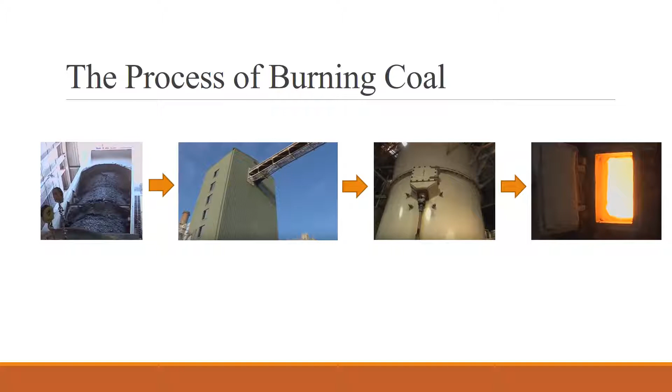The process of burning coal begins in the crusher house. Appropriately named, the crusher house crushes the coal until it is small enough to enter the pulverizer. The pulverizer further grinds the coal into a fine powder. As a fine powder, the coal is ready to enter the boiler. In the case of Gainesville Regional Utilities, the boiler was designed to burn the coal at a temperature of 2400 degrees Fahrenheit to generate 1.7 million pounds of steam per hour.

This steam heats steel pipes filled with water, producing approximately 2,000 pounds of pressurized steam, which is applied to a turbine. The spinning turbine delivers 315,000 horsepower to an attached generator, providing the plant with 248 megawatts of power.

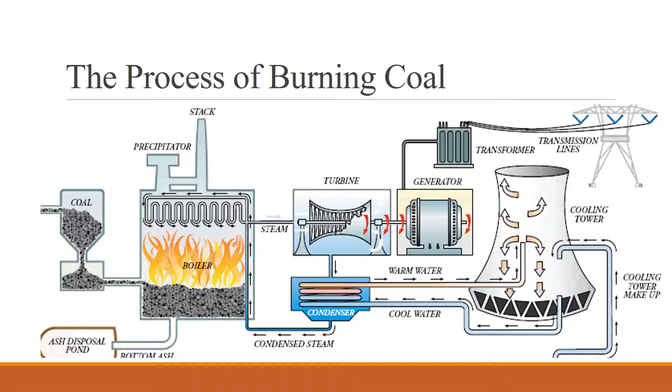The problem with this process lies within the coal content and applied heat. Coal consists primarily of carbon, hydrogen, nitrogen, oxygen, and sulfur. When heated, the elements are capable of reacting with one another, and as a result, pollutants such as nitrogen oxides, sulfur dioxide, and carbon monoxide are formed.

When electricity is generated in coal-fired power plants, harmful fumes called flue gas are produced. These fumes contain toxic pollutants that could be emitted into the environment if not properly controlled. Regulations are put in place to ensure proper air control technologies are implemented and industries are able to provide power to the public without jeopardizing their health.

Last amended in 1990, the Clean Air Act required the Environmental Protection Agency to set national ambient air quality standards for pollutants considered harmful to the public and the environment. The pollutants listed under these standards are considered criteria air pollutants and are strictly regulated.

On December 16, 2011, the EPA finalized the first national standards to reduce mercury and other toxic air pollution from coal and oil-fired power plants. However, it was not long until industry challenged the standards put forth by the EPA, requiring additional cost-benefit analysis the following year. This exchange went on for a while until the EPA was able to finalize the supplemental findings in 2016, ensuring the enormous health benefits of the mercury and air toxic standards.

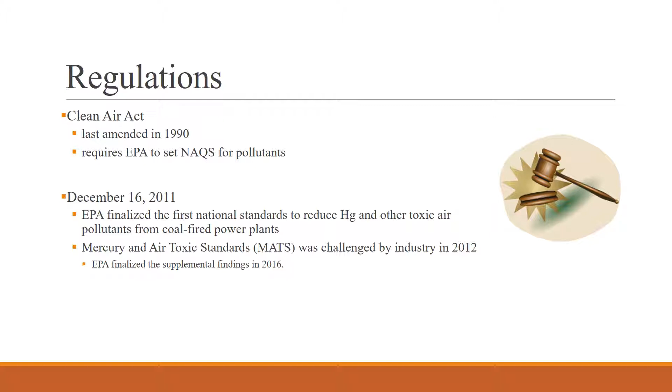With the standards put in place by the EPA, we can control the emissions of harmful pollutants from coal-fired power plants. Pollutants created by combustion of coal include nitrogen oxides, sulfur dioxide, lead, particulate matter, mercury, and carbon monoxide. For nitrogen oxides, nitrogen dioxide is regulated by the emission standards put forth by the National Ambient Air Quality Standards.

The primary standards put forth are to provide protection to the public health, while the secondary standards listed are to provide protection to the public welfare, animals, crops, and vegetation. The primary standard for nitrogen dioxide is 100 ppb. This is in the form of the 98th percentile of 1-hour daily maximum concentrations over 3 years.

The primary standard for sulfur dioxide over 1 hour is 75 ppb in the form of the 99th percentile of 1-hour daily maximum concentration, also averaged over 3 years. On the other hand, the secondary standard for sulfur dioxide over 3 hours is 0.5 ppm and is to not be exceeded more than once per year.

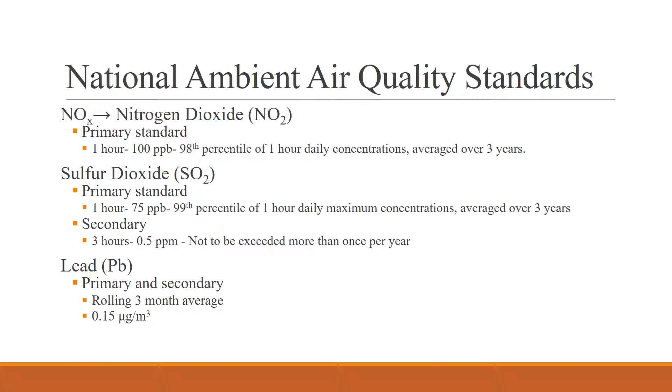The primary and secondary standards for lead are the same at 0.15 micrograms per cubic meter. This is on a rolling 3-month average basis. For particulate matter, PM2.5 and PM10 are regulated and both contain primary and secondary standards of 12 micrograms per cubic meter and 150 micrograms per cubic meter, respectively. These are under the designated time intervals.

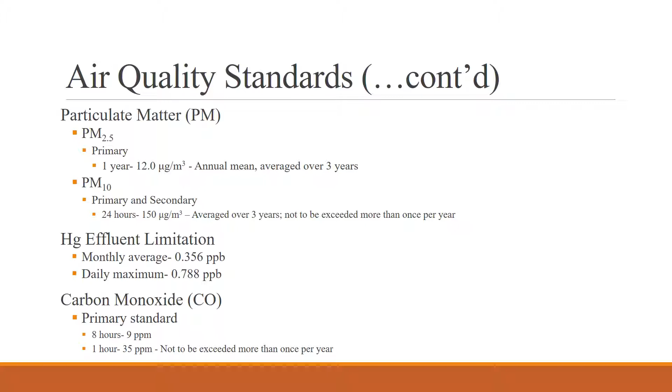Emissions of mercury are regulated under the Mercury and Air Toxic Standards, also known as MATS. These standards establish an effluent limitation of 0.356 ppb on a monthly average and 0.788 ppb as a daily maximum. Last but not least, the primary standard for carbon monoxide over 8 hours is 9 ppm, while over 1 hour the standard is 35 ppm and is to not be exceeded.

A major concern of coal burning is the impact of particulate matter, classified as PM2.5 or PM10. Both contribute to respiratory problems. However, PM2.5 travels deeper into the airways than PM10 and is therefore a greater concern. PM2.5 has been linked to causes of asthma, lung infections, and with long exposure has been linked to more severe illnesses such as chronic obstructive pulmonary disease or even lung cancer.

Sulfur dioxide can also affect the respiratory system, posing greater risk to children, the elderly, and to individuals with pre-existing respiratory problems. For adults and children who are susceptible, inhalation of sulfur dioxide causes inflammation, bronchitis, and decreases in lung function. Further threatening the health of those susceptible, nitrogen oxides react with chemicals in the atmosphere to create pollution products such as ozone, nitrous oxide, and nitrogen dioxide, which can increase wheezing and coughing in asthmatic children.

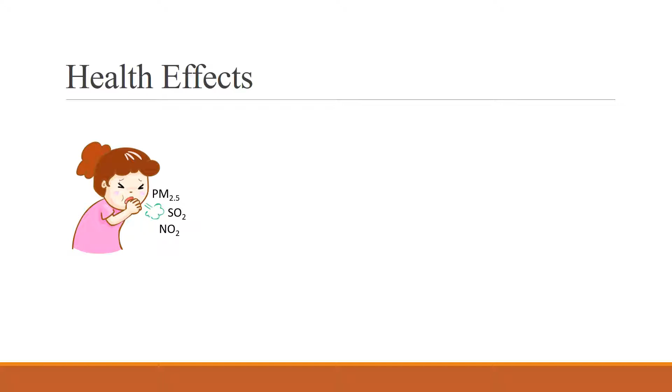At high concentrations, it may cause inflammation as well. Aside from causing respiratory problems, particulate matter can travel from the lung to the heart, making it a probable cause of cardiovascular diseases and in worst-case scenarios may lead to death. Other problems that could arise from the emissions include abnormalities in fetus development.

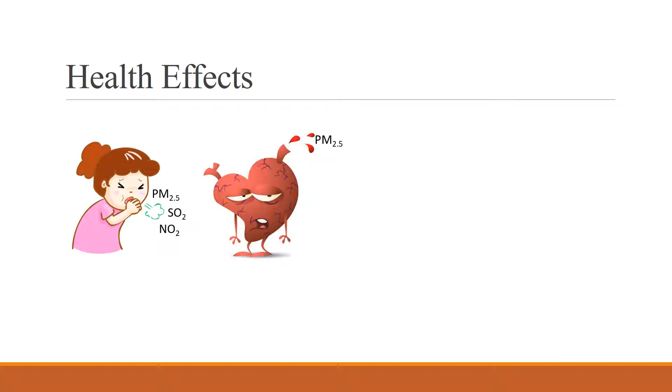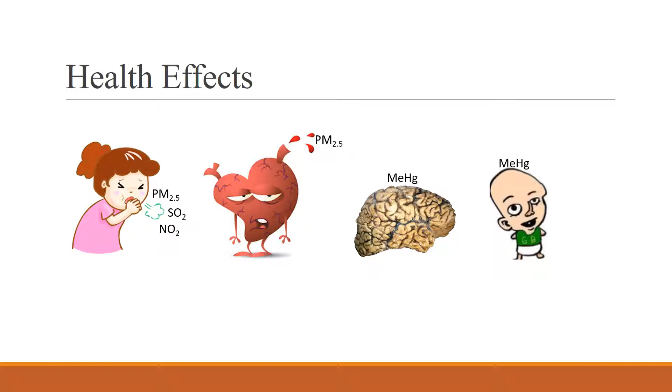When mercury, a heavy metal contained in coal, is released into the atmosphere, it becomes deposited in water, converted into methylmercury, and can travel up the food chain, negatively impacting the children of pregnant women. It has been linked to neurological disorders in these children, in addition to premature birth. While these emissions pose a threat to the public health, threats to the environment are also extremely important to address.

Global climate change is caused by the accumulation of greenhouse gases in the Earth's atmosphere. Two of the major greenhouse gases contributing to climate change are products of coal combustion: carbon dioxide and nitrous oxide. As concentrations of these gases in the atmosphere increase, the average global temperature gradually increases, resulting in the melting of polar ice caps, the thawing of permafrost, the rising of sea level, floods, extreme weather, and so forth. The change of climate creates many alterations in ecosystems, causing a decrease in keystone species such as coral reefs.

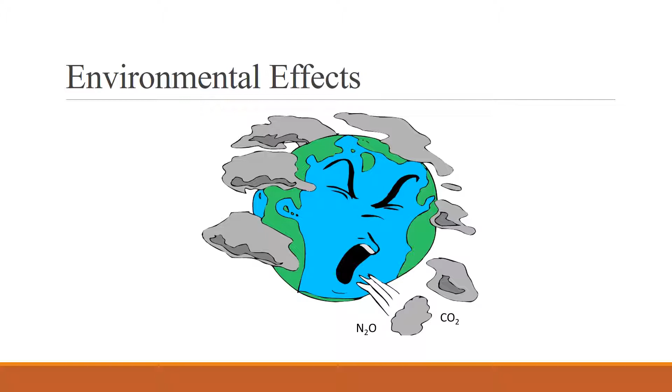Hi guys, so now we're going to talk about the control technologies associated with each of these pollutants. So first up, we got sulfur dioxide, and sulfur dioxide is usually controlled either by blending the fuel, using fuel with a lower sulfur content, or just straight up removing it from the flue gas. There are two methods to remove it from the flue gas, which include wet FGD systems and dry FGD systems, and dry FGD systems are often preferred because they have lower construction costs, simple unit operations, result in reduced water consumption, and the byproduct is easily handled because it's solid.

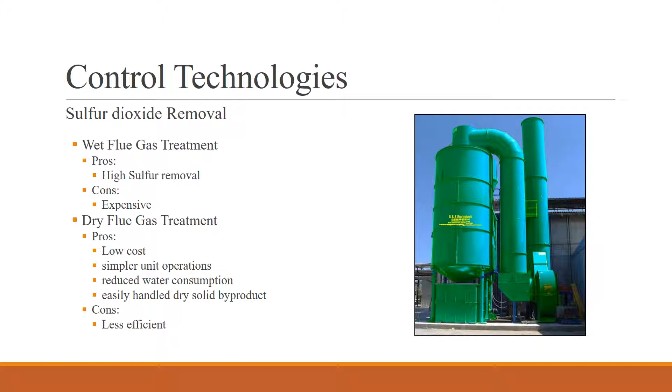Within these dry FGD systems, there are dry scrubbers, CDS, circulating dry scrubbers, dry sorbent injection, DSI, and spray dryer absorber. Nitrogen oxides are controlled via selective catalytic reduction, SCR, or selective non-catalytic reduction, SNCR. For these processes, a chemical reagent is injected into the flue gas, reducing NOx to N2 and H2O.

SNCR injects either urea or NH3 at high temperatures, being 760 degrees Celsius to 1100 degrees Celsius. However, at these high temperatures, excess reagent may react with oxygen to form NOx, reducing removal rates. So this actually reduces the removal rates to around 15 to 35%. Because of these low removal rates, SCR is the preferred method and is the method used in the Deerhaven plant.

The SCR method uses a catalyst which allows it to perform at lower temperatures, 360 to 450 degrees Celsius, which makes the process overall energy cheaper, but you do have to buy the catalyst, which makes it slightly more expensive. But it does result in 90% removal of NOx emissions, so it is the favorite method.

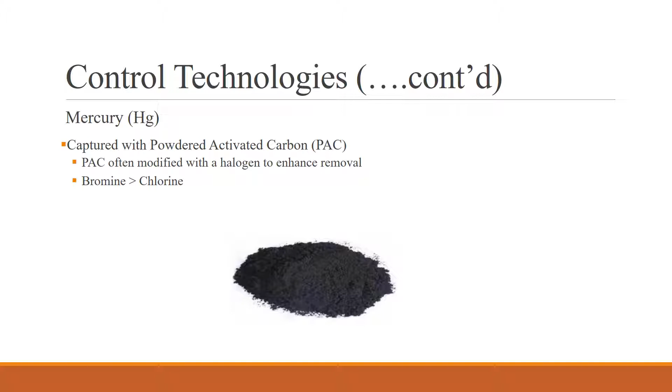Next up, we have mercury, which is captured with powdered activated carbon, or PAC. This powdered activated carbon is usually modified with a halogen, such as chlorine or bromine. Modifying it with chlorine in high concentrations has shown up to 90% of mercury removal, and even in low concentrations has shown up to 60% removal. Researchers think that this removal could be enhanced up to 10 to 15% if the chlorine was substituted with bromine.

Finally, we have particulate matter, which can be classified into PM 2.5 or PM 10, which is just based on the size of the particle. Particulate matter control devices include electrostatic precipitators, ESP, fabric filters, FF, mechanical collectors, MC, and Venturi scrubbers, VS. The chosen technology of the Deerhaven plant included a giant Venturi scrubber to collect their particulates.

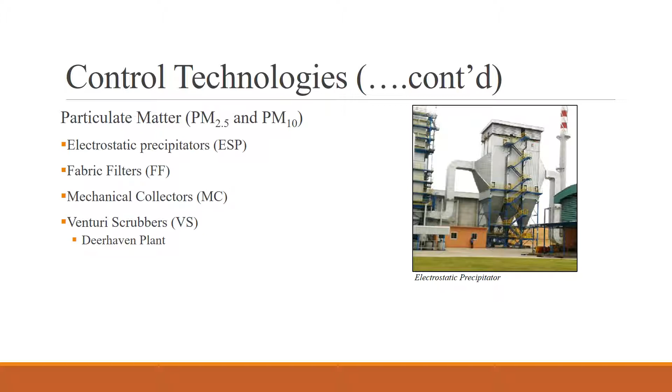As a brief summary, sulfur dioxide, nitrogen oxide, carbon dioxide, mercury, lead, and other pollutants are products of burning coal. If these pollutants are not controlled, then it could be detrimental to the public's health or even the environment. Some impacts include problems to the respiratory, cardiovascular, and nervous system, as well as contribution to climate change. Luckily, there are regulations in place that require these power plants to meet specific emission standards, and there also exists control technology.